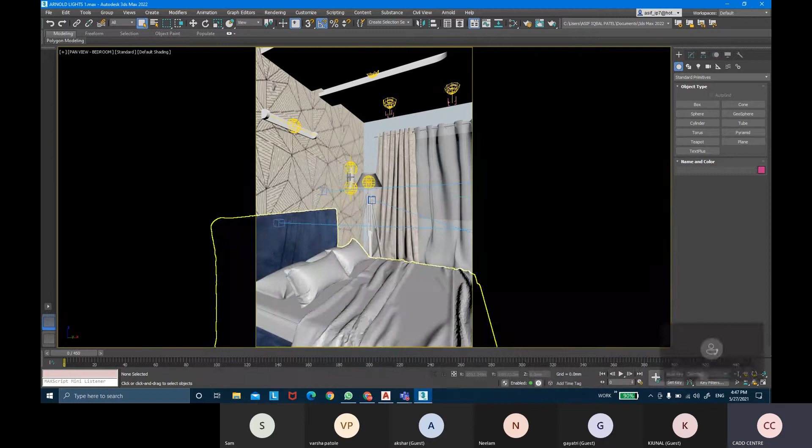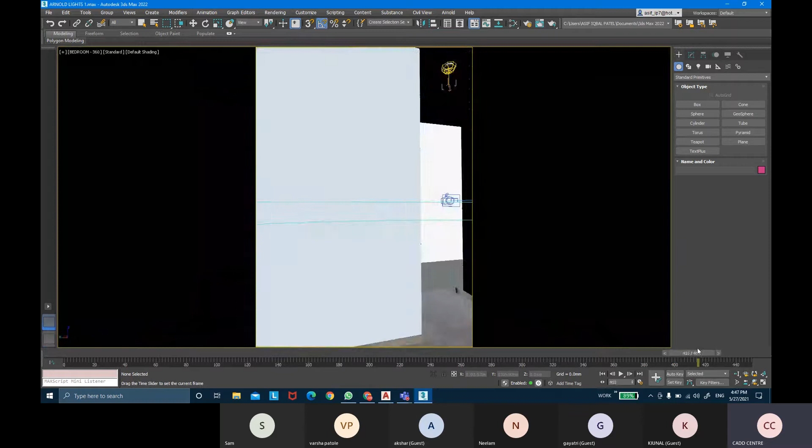Right. So in the last class we did walkthroughs, and we did two types of walkthrough. One was the pan walkthrough, and the other one was the 360 walk, like a turntable, completely revolving your view. So two different types of walkthrough have been created. Now today we're gonna do the fly-in walkthrough, how we can create a fly-in walkthrough.

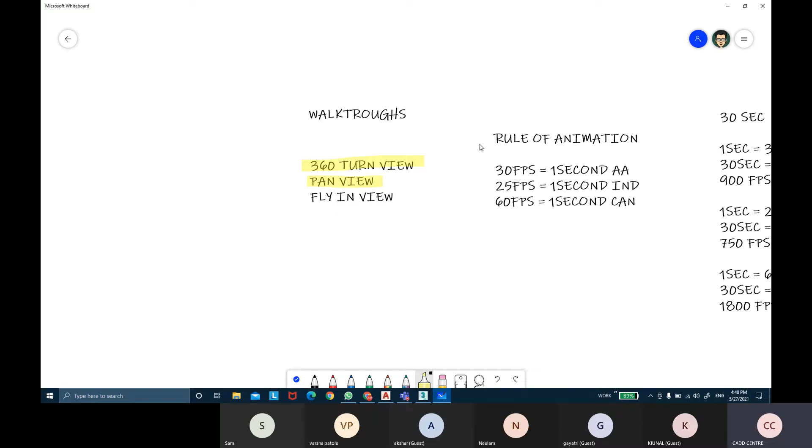So these two walkthroughs have been completed, the 360 turn view and the pan view, and now we are supposed to start with the fly-in view. These are our rules for animation: 30 fps, 25 fps or 60 fps as 1 second. And this is how we calculate the number of frames, how many frames would be required for that many seconds of animation. And this is how we get the estimated rendering time, what render time it will take to complete the walkthrough.

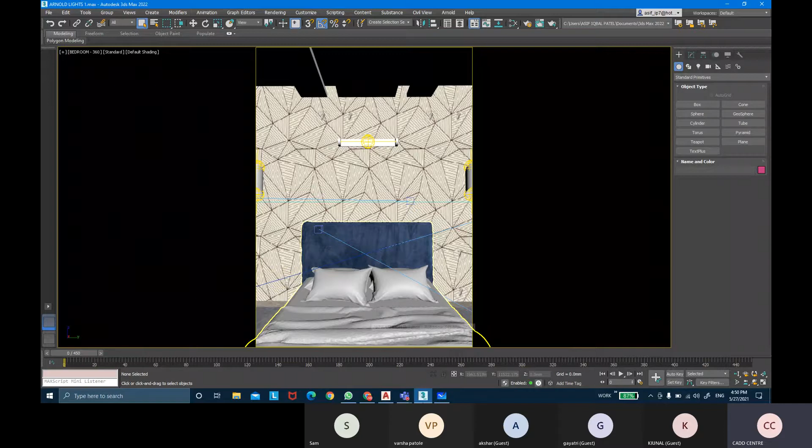So these were the rules for the walkthrough. Now for the fly-in walkthrough, what we're gonna do is come into the top view. Now in the top view, I'm gonna create a series of lines. I'll start my walk from this passage to this main living room. Then I'll go and revolve in that living room.

So I'll revolve in this living room, then pass through this kitchen. Then I'll walk out from the kitchen, walk into bedroom number one, walk out from bed one, walk straight into this passage, and then maybe go into this room and orbit around, and then I might go into this bathroom and come out, walking from wherever you want to start. So you need to continuously keep creating your line element, and the line should be continuous, not in a broken pattern.

So I'm going to take the line command, or I can even take extended spline for this, or you can even take NURBS curves, CV curves. So I'll come into create, take NURBS and take CV curves to create smooth lines. So I may start from here, walk straight into this door, then slightly turn, walk into this, around this center table.

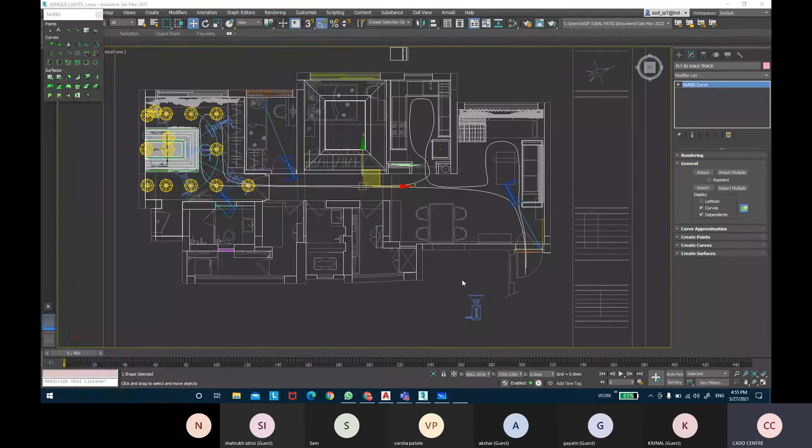So 2 minutes is equivalent to 120 seconds, and we are taking 30 fps as our time configuration. So in the calculator, calculate the number of frames required. 120 seconds into 30 fps, that is 3600 frames required to complete 2 minutes of video. So we're going to come into time configuration and put the end time as 3600. Now we can click on OK. So now we have 3600 frames.

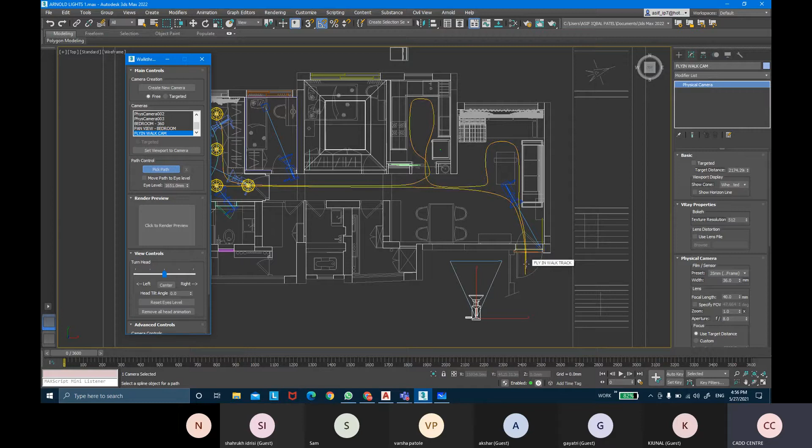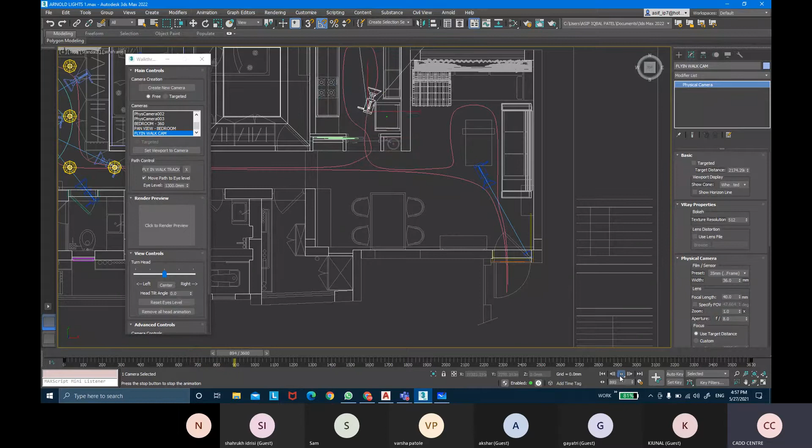Now we can select this camera, come into the animation menu, walkthrough assistant, select the camera, take the pick path command and pick this path line to set it there. Then you can move your camera to the eye level position. And now if I play this sequence, you can see that the camera is following that track of line. So it plays. We can go into the camera view and check what we will be seeing.

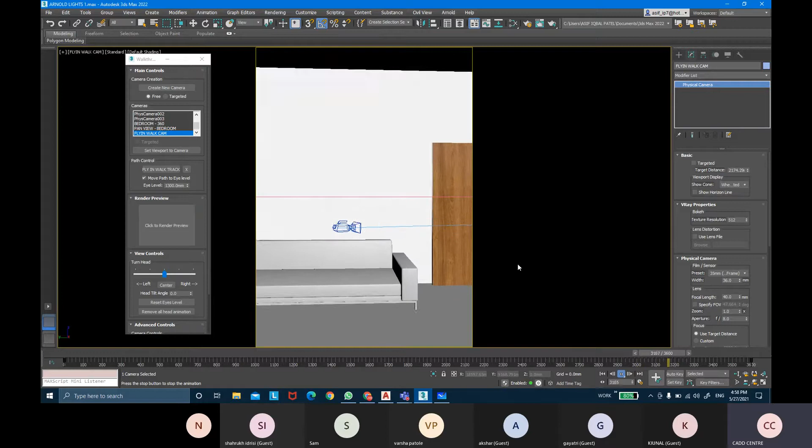Okay, so that's the end of the view. Now over here, when we enter this room, I would just want to show that the door opens and then closes basically there. So we want to show a bit of door opening animation as well.

Just drag this point curve a little back. Okay, so it starts from here. So when we roll the camera, the door should swing open and then the camera should go out. So we want to show the door animation as well. So we're gonna count over here. So we're gonna start selecting the door.

Okay, and we need to give the animation to the door. So we have selected the door that we need to animate. And now you need to click on this button which says auto key to set a key basically there.

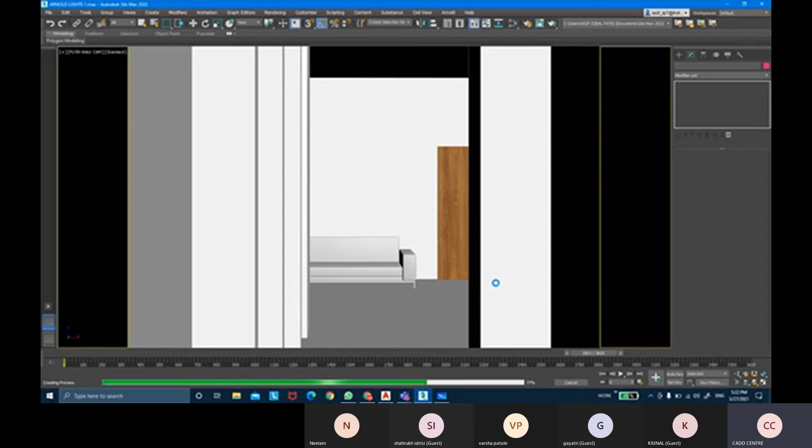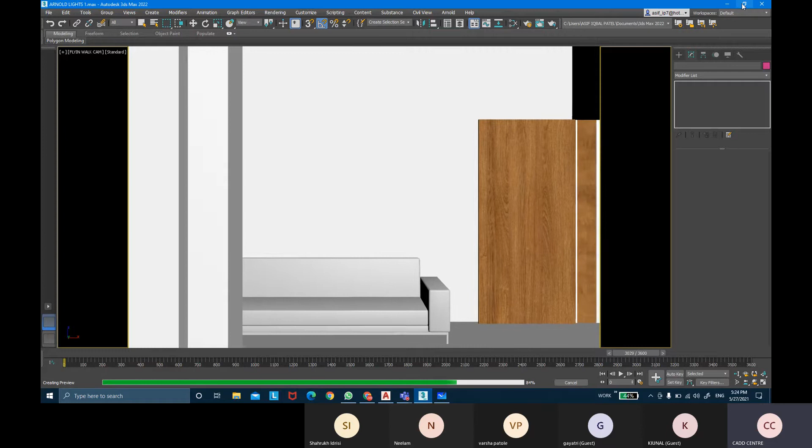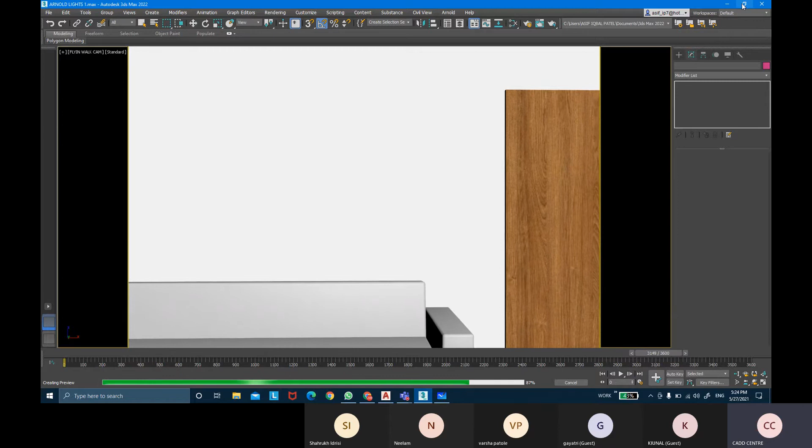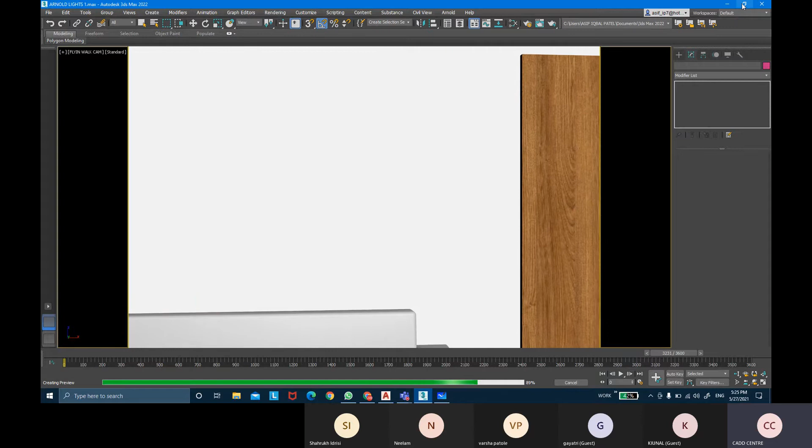Little more time. Near to completion.

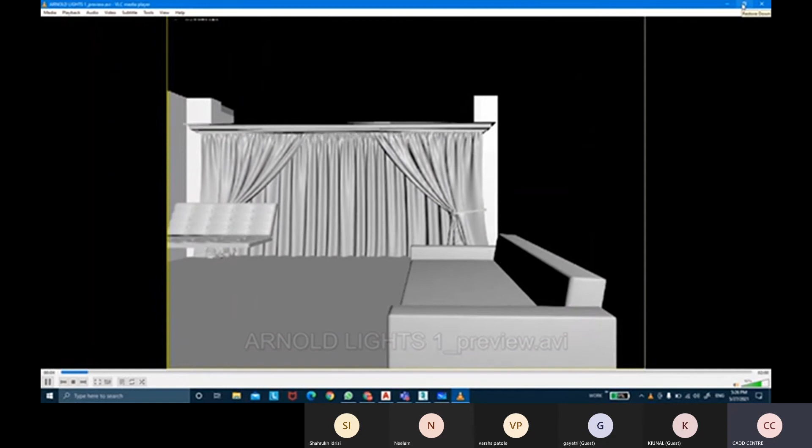Right, so we can see that animation. And remember, this is just a preview to grab how your camera with rendering would look. Okay, what and how much speed duration will it take? Is the turn perfect? Is the animation perfect or not?

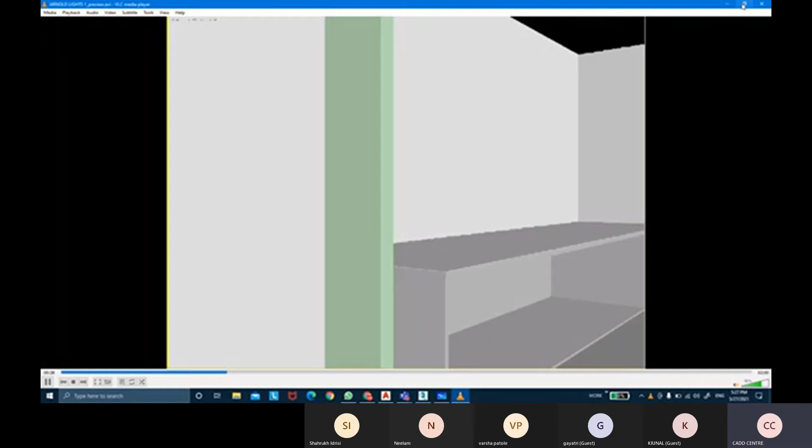Okay, so before we hand it to the client the render view, or before we put it for rendering, we always use these preview modes to see whether the process of camera or the animation sequencing is correct or not, so that all the mistakes before we do walkthrough rendering are seen in this, and whatever we need to rectify we can rectify in this as well. Okay, so we don't need to change anything or re-render, basically.

So to avoid re-rendering of the walkthrough, we see these preview modes and check whether all these preview settings of the camera or the placement of movement of the camera is correct or not. And if it's not, then we shall change the settings of these movements of cameras.

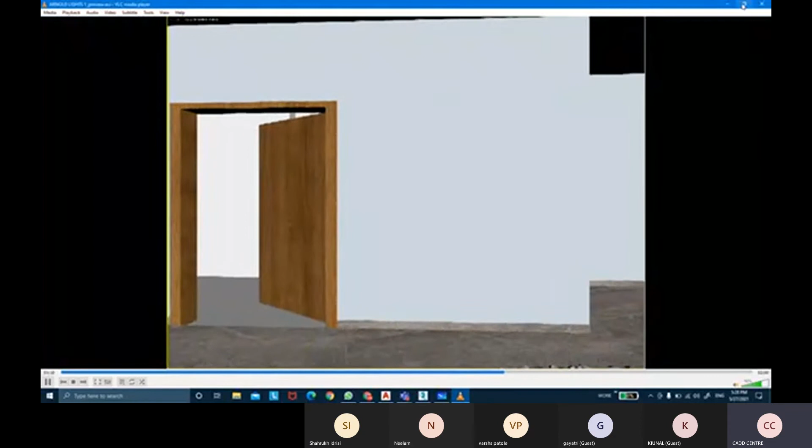So if there are turn issues or camera placement issues or something like that, what you can do is come into the top view, select that line, and then adjust these curve lines that you have created wherever the issue was. Supposing over here I'm getting a sharp turn basically,

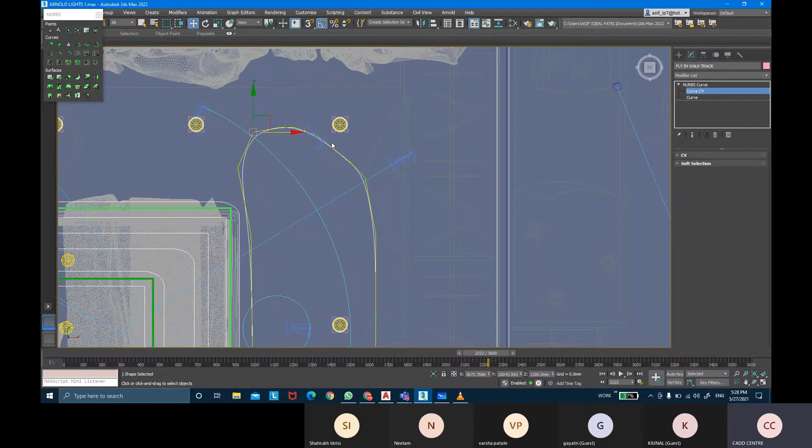right over here. Okay, so we can tell it we don't want that much sharper turns, we can increase a little bit more curveness this way. So now when it turns, it turns a little more smoothly direction-wise basically. Okay, so the more you adjust it, the more the camera will adjust itself also.

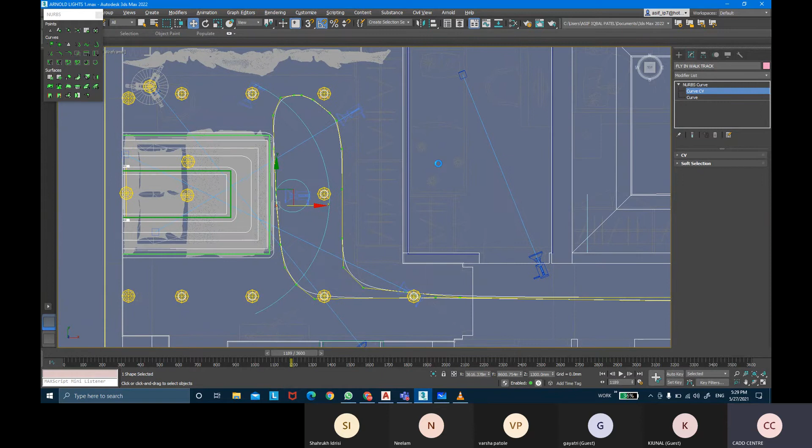Okay, so however you adjust the views, you can take it all. Then you can look around and see how the camera works out. Delete some of these points. Ensure it has a smooth curve actually. So the track should have a good curvature when the camera turns in.

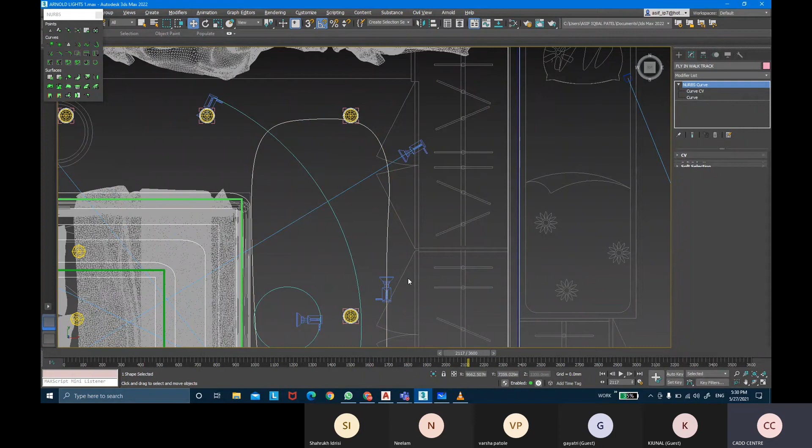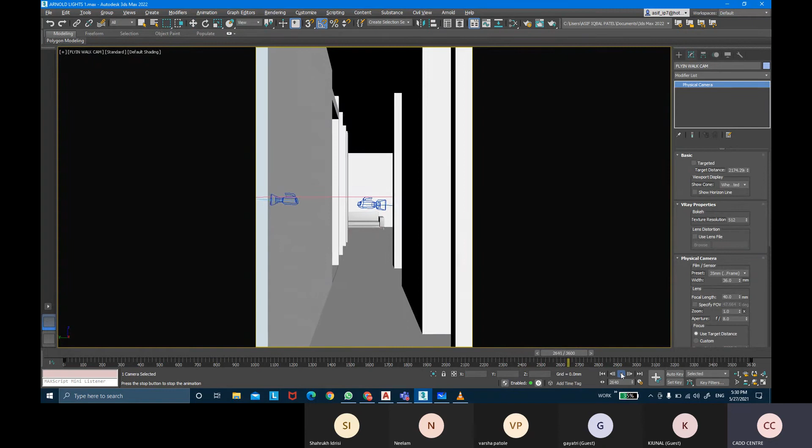It turns smoothly instead of jiggling, basically. So you just have to adjust the path positions for your cameras, basically.

Now if you want to render this walkthrough, the procedure is the same. Come into the Rendering menu, take the Render Setup dialog box. Now in this, you select the active time segment, scroll all the way down to Render Output, click on Files and tell where you want to save this walkthrough, suppose on the desktop.

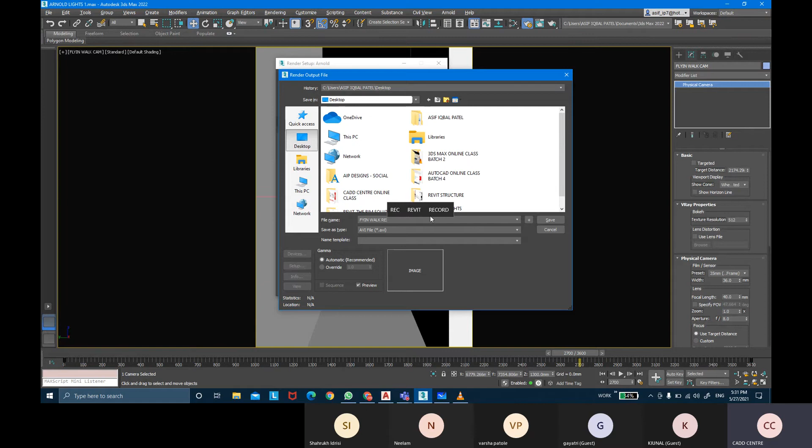Maybe I want to call this fly in walk render. File type would be AVI. You can hit Save. And now if I click on the Render button, it will start rendering all 3600 frames.

So it will start from the first frame, frame 0, which is the passage area, this frame from where the door is supposed to be entered. Okay. So if one frame naturally takes like 20 to 30 minutes, and we have 3600 frames, this might take a lot of time, but you shall get whatever output you require, basically.

Okay, it's still rendering, it's not yet completed. So this is the first frame to go in rendering. You have 3600 more frames for rendering. Once all the frames are completed, then your rendering would be completed, and that's where you can see the effect of everything, the lights and the camera and the materials that you have applied to the objects, in an animation format.

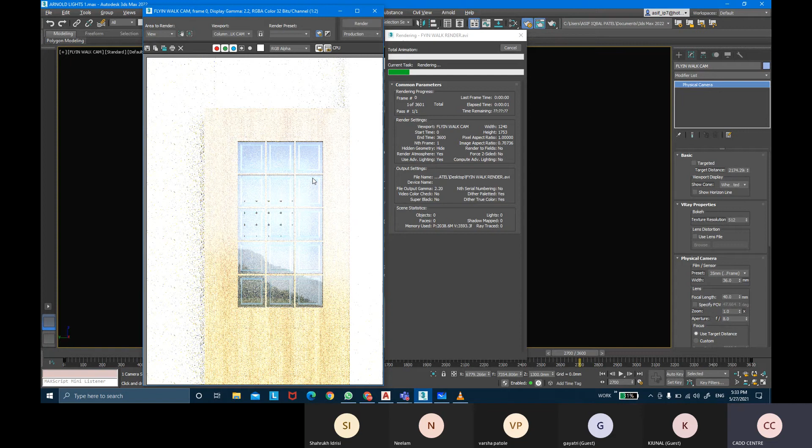So it's going to take a very long time to complete. So I'm going to stop this rendering process because that might take a serious amount of time.

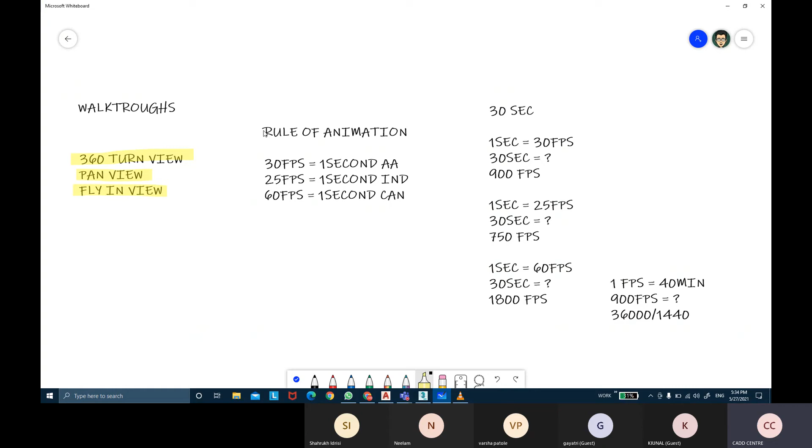That's how we complete our walkthroughs in 3ds Max, basically. So all three types of walkthroughs have been done: pan walkthrough, 360 turn view, and fly in walk. I also taught you about the rules of animation, like 30 fps, 25 fps, and 60 fps. This is the calculation method of the number of frames required as per your seconds of animation.

Okay, and this is the time calculator to calculate how much time it will take to complete the entire animation. So all the formulas and the entire walkthrough process, lighting, cameras, materials, how to create floor plans, how to insert blocks, editable poly, all these things are done, and that's the end of 3ds Max, basically.